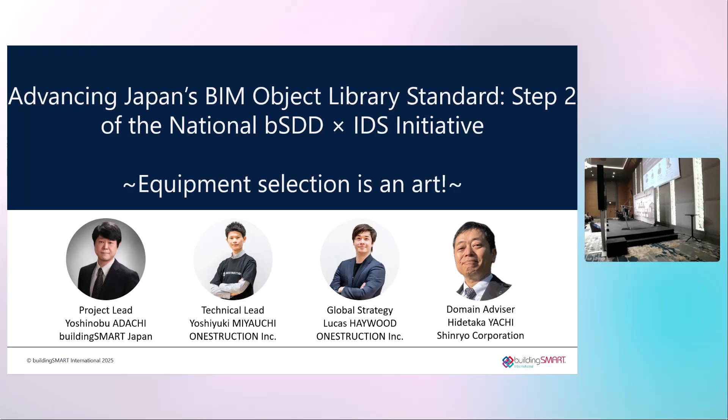Very short introduction. So today's agenda, let's jump ahead. At the Singapore summit this past March, we presented the roadmap and activities for developing the Japanese object library. Here at the Berlin summit, we will focus on more specific use cases and present how the library can be useful. We hope this session will be practically beneficial for those involved in equipment selection.

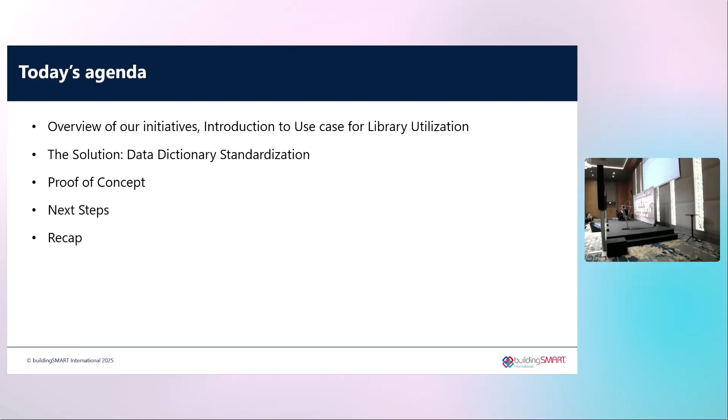Okay, so first of all, let's review the content from the Singapore summit this past March. After that, we will introduce a specific use case for leveraging the library.

So we are currently working on standardizing BIM object libraries using bSDD and IDS. This initiative is aligned with the global openBIM movement while being unique to Japan. We will present our library development roadmap, which we also shared at the March Singapore summit. At the Singapore summit, we introduced the development of the library template. Some may have found the conceptual and academic content confusing. At this Berlin summit, we will discuss how we are building the necessary concrete libraries and specific use cases, and demonstrate their effectiveness.

So we will explain the use cases we selected this time. As one use case, we will discuss equipment selection during the pre-construction phase of a building. Now let's turn this slide. Let's show the use case, yes. Mr. Yachi.

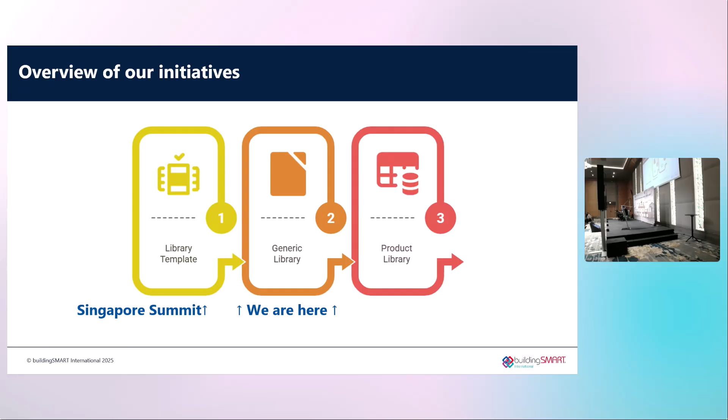Now, from that, I take it over. Today's presentation will focus on equipment selection. When selecting the right equipment, it's common practice to first refer to the manufacturer's catalog. However, equipment selection is becoming increasingly complex with diverse design requirements, environmental considerations, and regulatory compliance. The burden on the design engineer is growing daily.

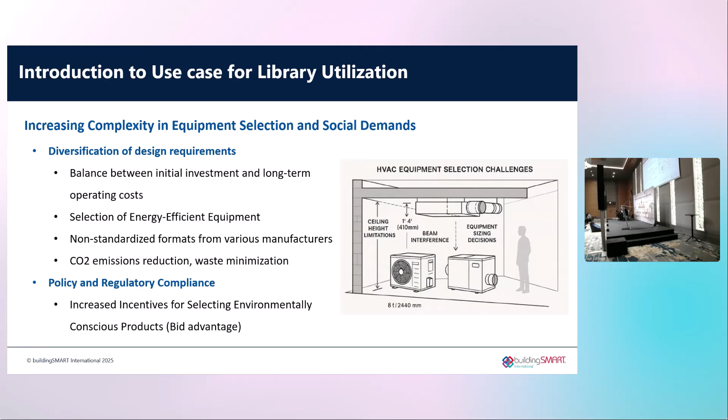This slide lists some of the challenges that engineers constantly face. When asked, everyone asks me, do you always struggle with those issues? My answer is yes, we are constantly trying to find the best solution. Okay, we cannot install the 10 kilowatt unit in the ceiling.

We cannot install a 10 kilowatt unit on the ceiling, so let's install the 5 kilowatt unit instead. First, we need to carefully check the installation conditions, such as the installation space and environment condition. The design specification can have a significant impact on the cost. Furthermore, depending on the operating conditions, power consumption can vary considerably.

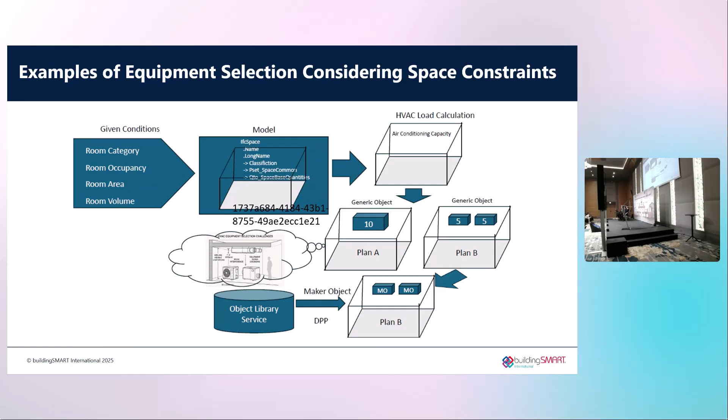As an environmental specialist, I have a strong responsibility to address the global challenge of reducing greenhouse gas emissions. I can confidently say that the HVAC systems I design always consider environmental impact assessment, such as life cycle assessment, LCA.

In the final decision-making stage, we refer to the catalog again, considering the performance data provided by the manufacturer and the installation condition. We use calculation and simulation to verify sustainability, cost effectiveness, and environmental impact. This is the process of selecting the optimal equipment, and I believe this is truly the best way to make a selection.

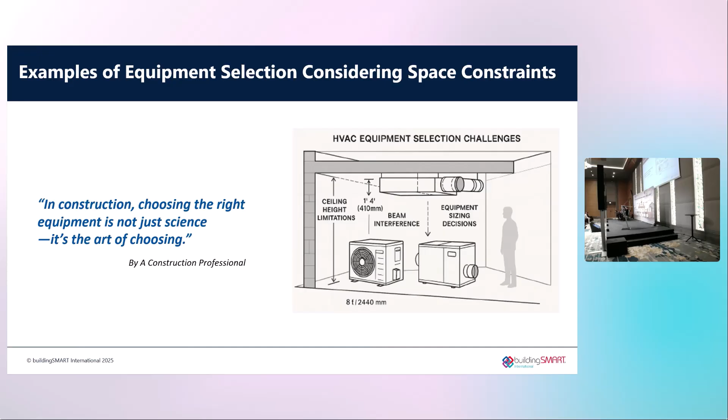Some engineers may find this work rewarding. However, in reality, it often leads to long working hours, because human capability has limitations.

This process often becomes a bottleneck. As a result, we may not be able to provide the optimal solution. Again, the goal is not simply choosing the equipment. The real challenge is to select the best option from among multiple choices, each with different conditions. We are purposely using generic data in this phase.

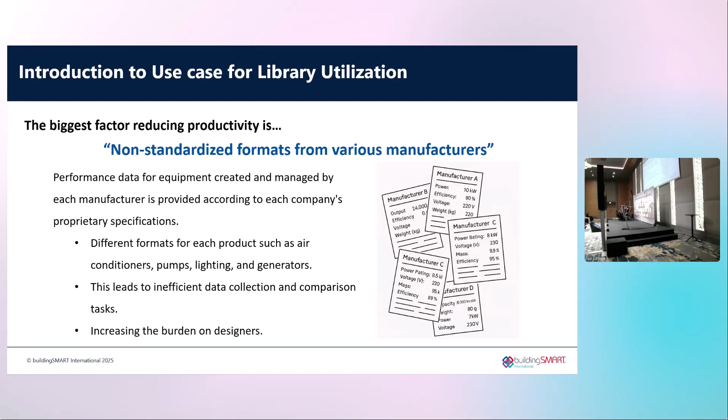Okay, so Mr. Yachi talked about the reality of the environmental design process as engineers. So in my part, I'd like to summarize and connect how his story relates to the generic object library and the bSDD. So far, Yuki told about the Singapore summit.

If I summarize again, we tried to convert the existing BLCJ, BIM Library Consortium Japan's published spreadsheet format object library template, into bSDD. That was the summary from the last summit. So on top of that, this time we took on the challenge to populate the generic object library on bSDD. That is the focus point of this presentation.

The generic library provides generic information of a product, and it is independent from specific manufacturers, very neutral, standardized information. This generic information covers basic information such as type, product type, performance, capacity, and object size as dimensions. For example, this kind of information is very useful for technical calculations for air conditioning design. So this is the basic idea.

In this slide, I'm going to look at how the generic object library plays a role in design processes. If we were doing environmental design or HVAC design, you would probably first identify the basic spatial information, such as space type, area, volume, and occupancy numbers. These are typically non-graphical information at the beginning.

As the design process moves forward into pre-construction, coordination with other design disciplines becomes very important and essential. For example, the architectural team provides key room information, and in HVAC design, key factors such as room height and pipe space cross sections are critical for selecting the right product. In this process, the generic object library is particularly useful, allowing us to coordinate spatial reservations with other discipline models and to get the basic information for quick product selection.

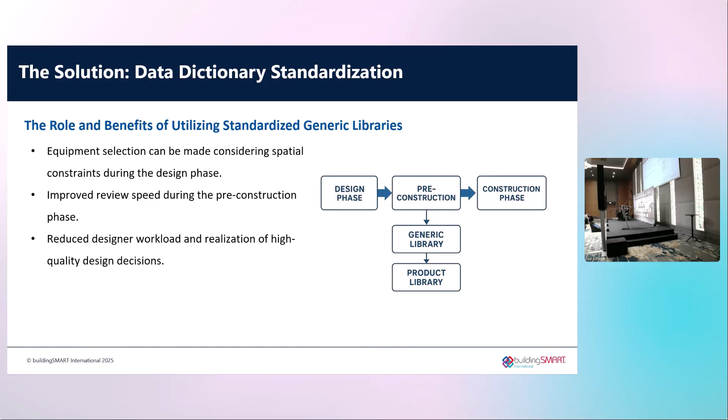This is my last slide, and the message is very simple. If we were to put all the attribute information from the generic object library into a proprietary BIM object format, it would be very difficult and costly to manage that information, and it would also be very difficult to utilize the standardized attributes in downstream applications.

Based on our past experience, a best practice could be to manage attribute information on generic object libraries with bSDD and to keep a single source of truth environment. Although there is no established method in this field yet, we tried to carry out a proof of concept as part of our bSDD use case development project. Next, Yuki will introduce the POC part of our project. Thank you.

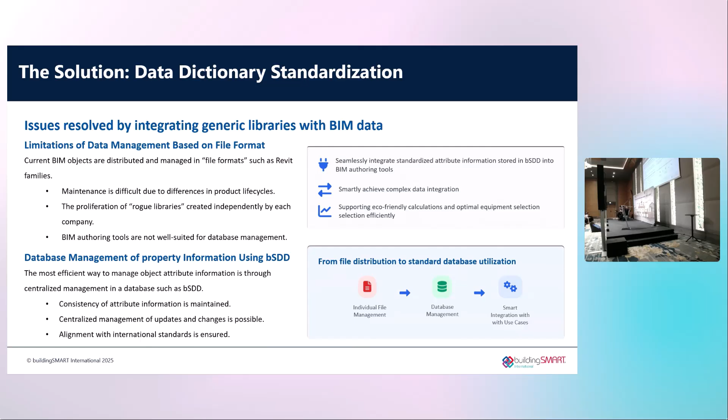Okay, so now it's time for a very short proof of concept. We spent a lot of time explaining the use case concepts and centralized management of information property sets using bSDD. So I will briefly show the proof of concept.

For the proof of concept, we adopted OpenAEC, an all-in-one tool for openBIM. It enables low-cost implementation of openBIM, making it a highly affordable solution even for projects with limited budgets. Additionally, it offers high compatibility with, for example, Autodesk products, so not all project participants need to own BIM authoring tools. Collaboration between OpenAEC and Autodesk products achieves cost optimization.

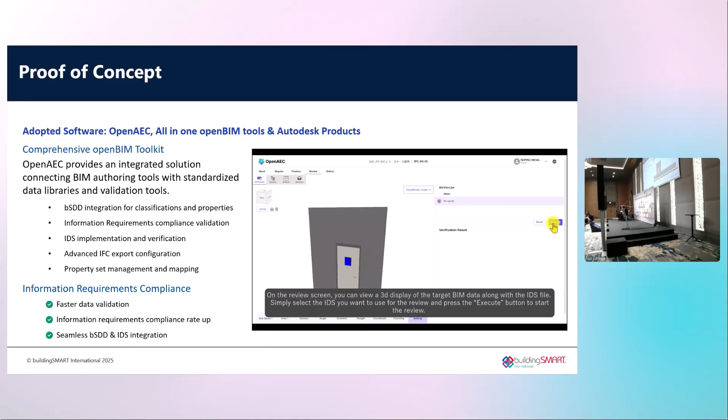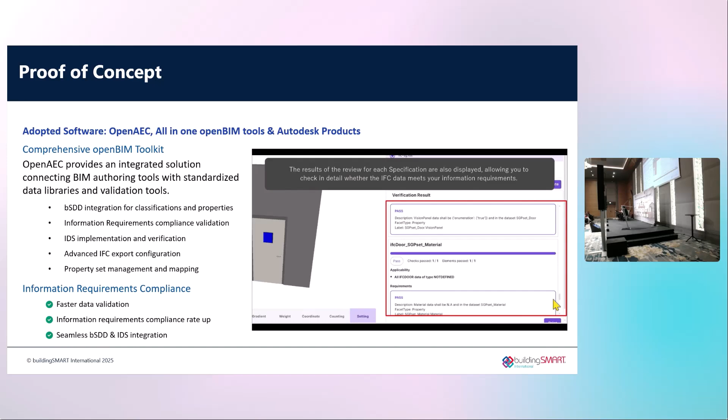OpenAEC provides an integrated solution connecting BIM authoring tools with standardized data libraries and a data validation tool. You can create both bSDD and IDS, and you can also import IDS into IFC to perform compliance checks. Recently, we have added support for automatic conversion to IFC by uploading Revit files, which frees people from the task of converting to IFC. During IFC data reviews, our product contributes to improving BIM data traceability by recording who reviewed which data.

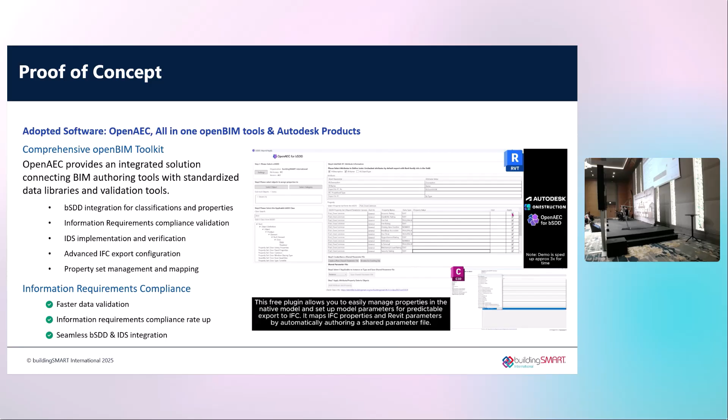Using the software adopted in the proof of concept, we leverage the generic library with clear results. Time required for equipment selection has been reduced, and the effort involved in reselecting equipment has also been significantly reduced. However, since equipment selection involves many use cases with a wide variety, our POC is highly limited, and metrics cannot be disclosed at this time. We plan to continue verifying various use cases and creating evaluation metrics.

Okay, so it's done. Final presenter.

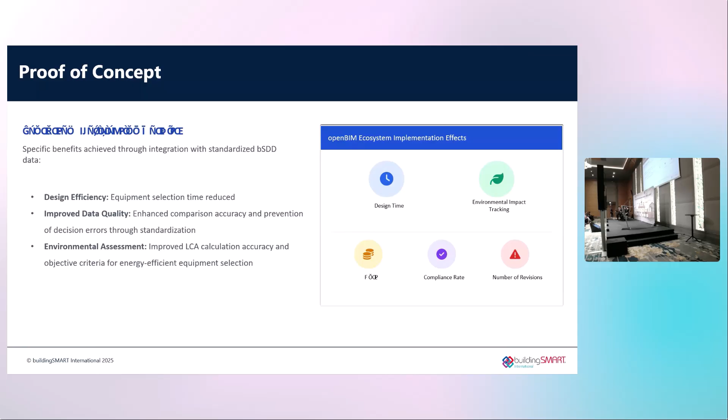Might go back one slide there. Okay, it's back. So yeah, if you didn't see it before, all jumbled up - design time and number of revisions are some of the benefits of this.

So today you guys saw some information about the real problems with equipment selection, especially in Japan, the reason for developing the generic library, and then a proof of concept workflow for that process, which involves the buildingSMART data dictionary.

Going forward as next steps, there are three key areas we feel we need to progress in. The first one is registration with the use case management system. As members of buildingSMART Japan, and as a company that is a proponent of openBIM, one of the things we hope to develop is this project to the point of registering on the use case management service.

In that way, contributing back towards the repository of shared global assets and workflows. The second thing is around environment and sustainability. This is a really important factor when it comes to equipment selection. Nationally within Japan, there's a push to standardize life cycle analysis requirements. We hope to promote the compliance of the products, and also the generic library, with the data requirements of these internal Japan standards, but also international environmental standards.

I think that's also very important, because right now a lot of equipment selection is focused on sizing and design and performance, whereas we feel it has the opportunity to be pushed through this kind of project and library and object selection into something that allows you to trace and then ultimately reduce embodied and operational carbon across scopes 1, 2, and 3, essentially up and down the supply chain.

So to recap, I think really the core points of this project are to make the process of selection easier and better. As Yachi-san mentioned, the process of selecting equipment is a little bit siloed within Japan. You're not allowed to select exact equipment during the design stage - that needs to come later. So we've broken up that process into selecting generic objects for sizing purposes, and then someone can match real products onto those generic objects. By having this library and having the restrictions and the kind of digital passports attached to those objects, people are able to do that design and equipment selection much easier, much faster, and at a much higher quality.

The second thing is accelerating the digital shift. Within Japan, we always say DX, which is digital transformation.

To what extent that has been accelerating or decelerating or staying flat is a point of discussion, I think. But really with this, we want to help people in the construction industry and manufacturers adopt these kind of digital workflows that are becoming more recognized and standardized throughout Europe and the world. So I think as Japan, we need to align with that and keep up and accelerate.

Enhancing manufacturers' international competitiveness, I think, is really important with leveraging this, so that we don't stay fully centered within Japan only. Obviously there are Japanese requirements that need to be met by manufacturers, but international standards become just as important. Having a dictionary of products that is compliant with international standards allows the Japanese manufacturing industry to remain competitive on that international stage, which is very important for us.

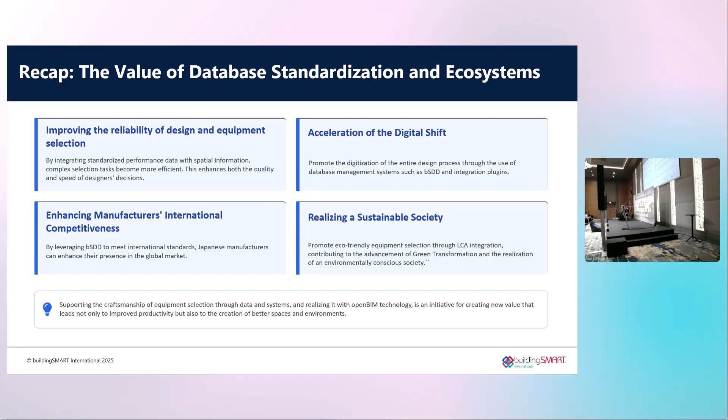Thank you for your presentation. I was wondering, when you mentioned LCA, there was a lot of presentation about the digital product passport and combining product data - so maybe some of the LCA data might come through the digital product passport. Just as an observation.

Yeah, the digital product passport presentations were very interesting for us. As a reference, I think they're doing it slightly differently to how we currently are through the bSDD. I think they're also doing it through - we were talking to Christian a little bit earlier - like AAS, allowing manufacturers to manage their data. I think we need a solution for that, and whether or not it's going to be exactly the same technology as the DPP is a question. But by complying with, generally the Japanese object libraries are within Japan, being able to compare and share information with other product libraries and do that kind of linkage is a very interesting concept.

This is one of Japan chapter's challenges, because there are a lot of Japanese manufacturers coming to the European market, so they should know about this kind of DPP or CPR. But we don't - Japan chapter has no tight connection to manufacturers, so we need much more conversations and to get such new companies involved in our chapter.

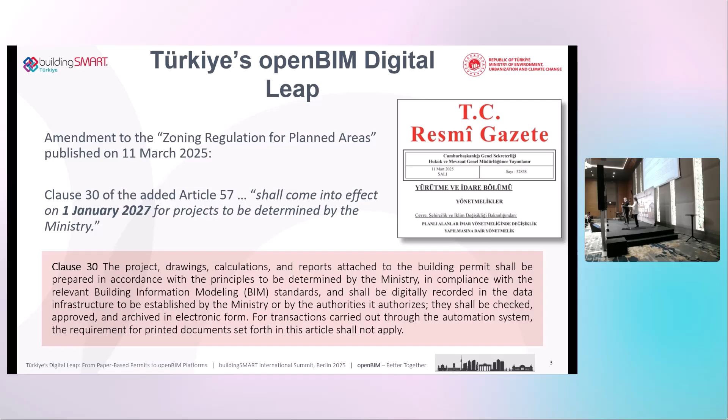Starting with buildingSMART Türkiye, I'll briefly talk about how we got here. We started in 2016, joining the airport room. My company builds airports, and we were at Schiphol Airport for the first meeting sponsored by Schiphol, where we saw and heard about buildingSMART. We organized under İMSAD, the Turkish Construction Manufacturers Association, applied for membership, and became a chapter in 2019.

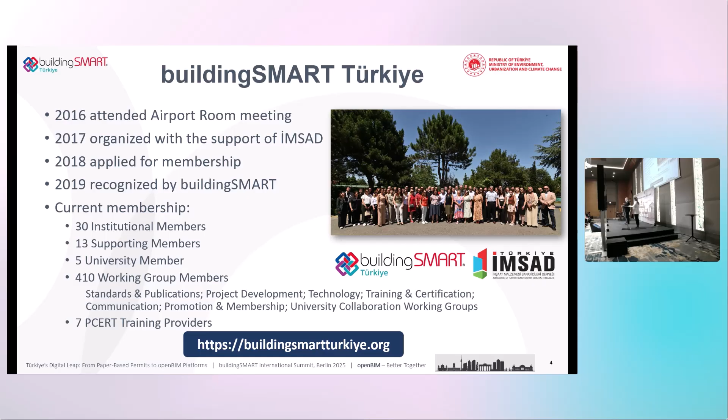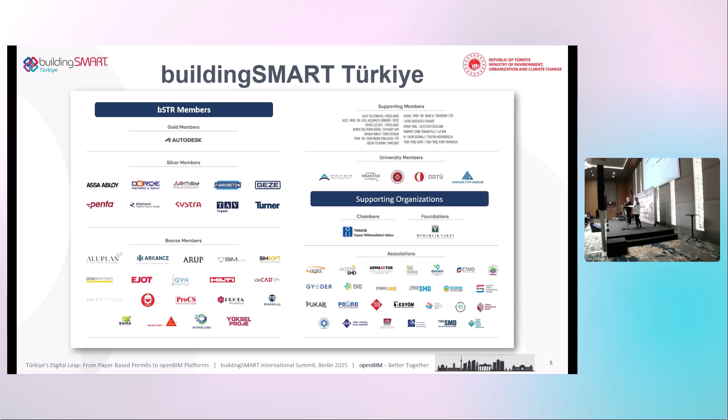We have a very good, healthy organization and membership, with several companies from different fields - software vendors, main contractors, design companies, universities, and a lot of organizations and chambers in the industry. So we're fairly well represented within Turkey, and we're very active, at least within our own industry and market.

We have a lot of collaborations. As I mentioned, the Turkish Standards Institute, we helped adopt all the relevant BIM standards, translated them, and created a unified language for the industry. We also worked with the Istanbul rail system for their BIM standards.

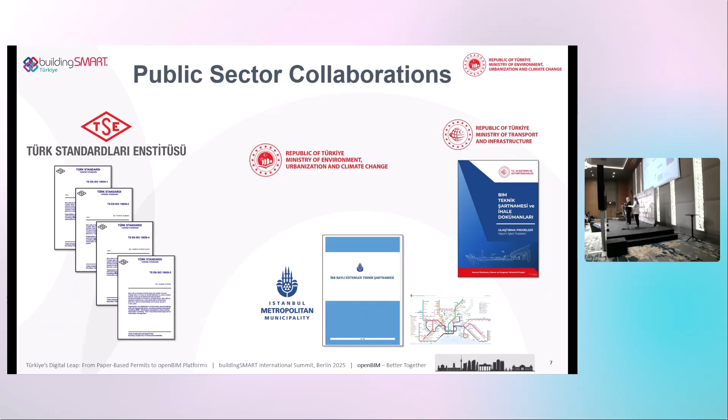Our members supported creation of those standards, and also the transport ministry BIM standards and tendering standards. All our members were involved in these, and of course today with the ministry, with e-permitting now. The public sector being the driving force in all this, I'll hand it over for the story of how we

came to today through the ministry and all their activities. Thank you, Ahmet. In Turkey, the Ministry of Environment, Urbanization and Climate Change is the driving force for BIM adoption. The ministry protects the environment, develops climate policies, and ensures safe construction through regulation and inspections. It also supports municipalities with planning standards and urban transformation projects. This strong public sector leadership is essential for the digital transition in the construction industry.

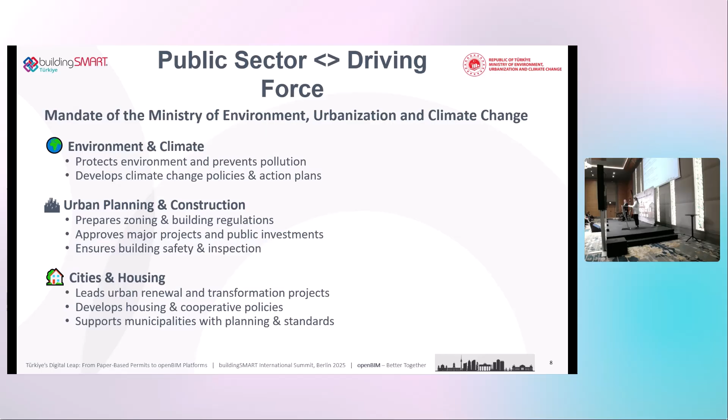The Directorate General of Vocational Service that I work in regulates licensing and professional standards for engineers, architects, and technical staff. This also includes regulation zoning projects. The Directorate General ensures technical quality and professional competence in the sector.

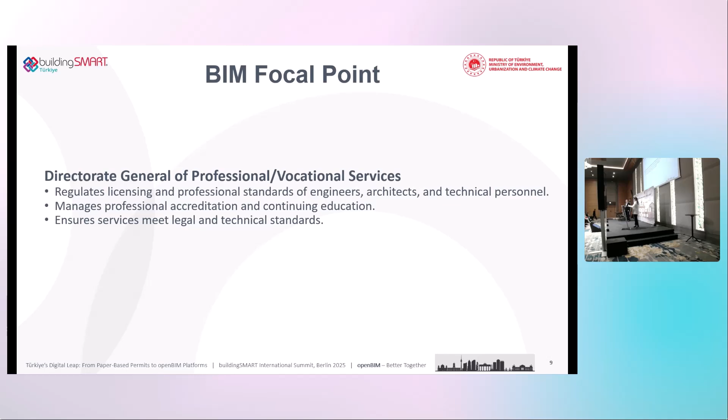Since 2019, the Ministry has taken significant steps towards BIM adoption. It joined the Turkish Standards Institute BIM Mirror Committee. Then we established a BIM working group and initiated collaboration with buildingSMART Turkiye. In 2021, BIM training programs were provided to more than 100 managers and technical staff. The Ministry also recommended expanding BIM courses in universities to prepare future professionals.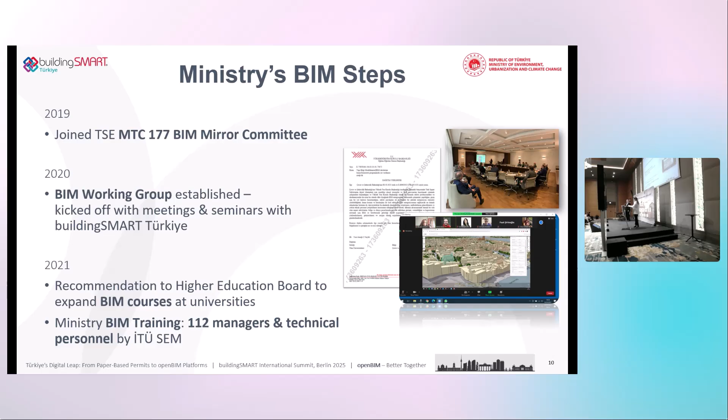The Ministry then prepared a roadmap for BIM integration and presented it to its directorates. The following year, a pilot project was launched, the Fikirtepe Secondary School, a 7,000 square meter building with 24 classrooms. This project, developed with Emlak Konut, served as a real example to test BIM-based design and approval processes.

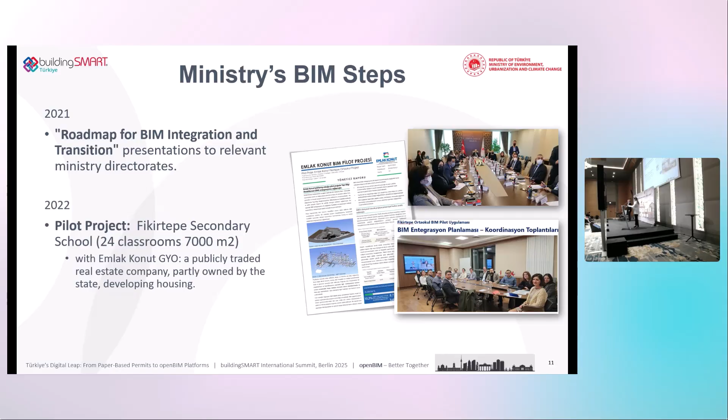In the 12th Development Plan of Turkey, digitalization in construction is highlighted. The plan calls for mandatory use of BIM and life cycle analysis in public procurement, the establishment of legal frameworks for digital project delivery, and integration of IoT technologies into construction projects. These policies demonstrate a strong national commitment to digital transformation.

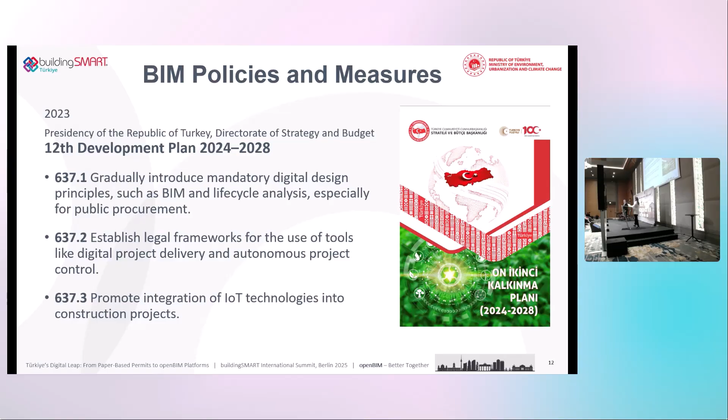The Ministry's Strategic Plan 2024-2028 also highlights digitalization. Its main objectives are to promote green buildings, strengthen professional competence, and ensure safe construction through effective oversight. The plan assigns the Directorate General of Vocational Service to lead the digitalization of the construction ecosystem.

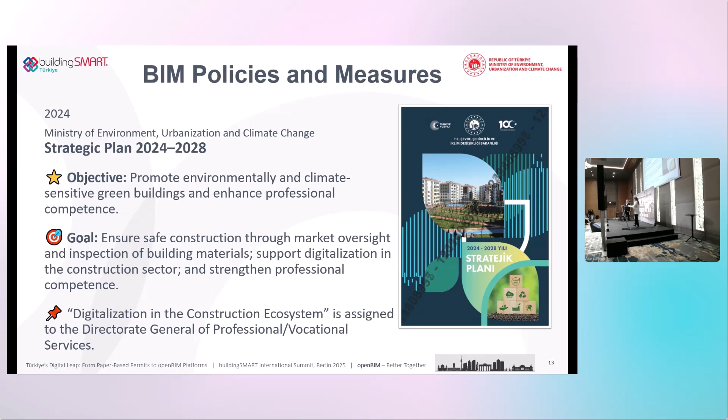According to the strategic plan, several strategies will be implemented. These include establishing a legal and technical framework for BIM integration, creating a BIM-based project delivery system, and enabling centralized management of 3D digital building models. The goal is to make the building permit process fully digital, standardized, and compliant with BIM standards.

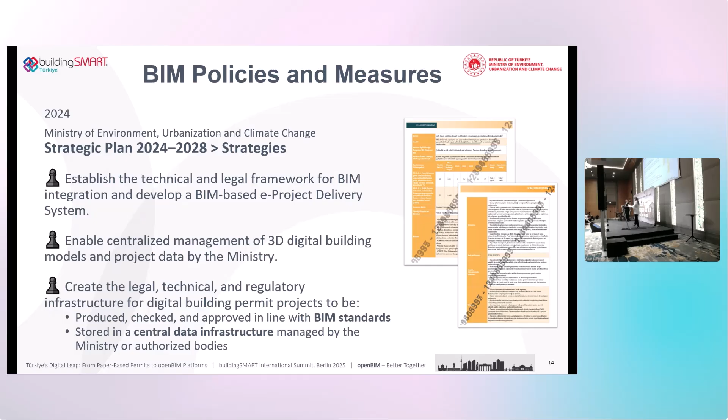Last year, Turkiye organized a digital construction and BIM collaboration program with the UK Department for Business and Trade. Focus group meetings were held with public, private, and academic stakeholders, involving more than 90 participants. This year, a national BIM roundtable workshop was conducted with 62 participants who worked on practical integration strategies.

The workshop resulted in a clear vision for the future. Turkey aims to achieve full digital transformation in the construction ecosystem, creating a built environment that is safe, efficient, and sustainable. This vision guides all ongoing and future activities in BIM implementation and digital project delivery.

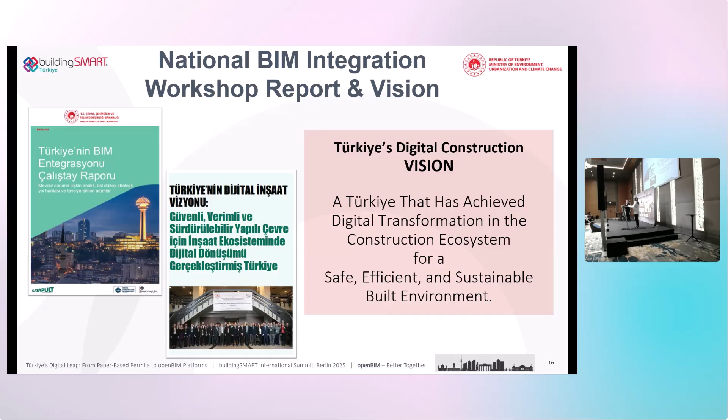So the foundation of where we are today is a long story, and just aligned with the amendment, there was an agreement with the Ministry and Istanbul Technical University to provide a foundation outline of all the changes and infrastructure needs for an e-project infrastructure that would support e-permitting in Turkey.

So there's a group of professors and academics from Istanbul Technical University, along with Middle East Technical University and buildingSMART Turkiye's members, working together to define the changes needed in regulations, the infrastructure needs, and the architecture of a system that will support all these submittals.

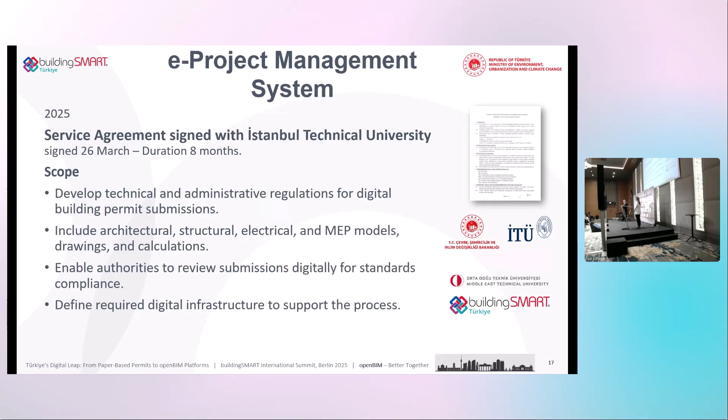The service agreement was structured in 3 phases. The first phase is complete, which was basically an overview of what other countries have been doing in the adoption of e-permit processes, and the challenges and opportunities.

The ongoing phase 2 is basically defining first a 2D digital delivery. Many of the municipalities are still submitting papers. There are a few municipalities that have their own infrastructure. And of course, phase 3 would be a full BIM delivery.

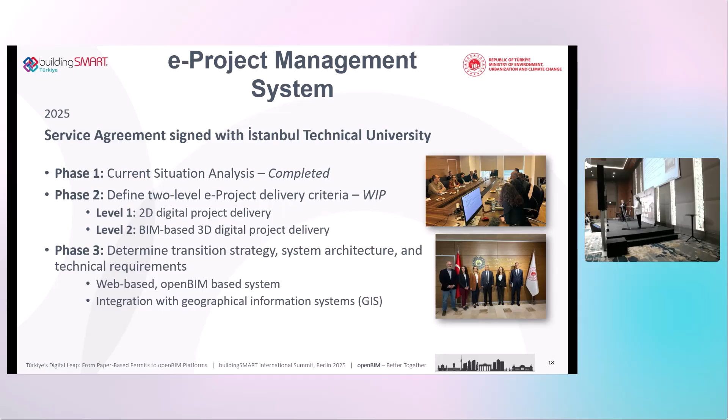Then phase 3 would be defining the IT web-based openBIM infrastructure, ready for procuring such an infrastructure in the next year. All of this is to be integrated with the ministry's current GIS systems as well, which we'll briefly discuss.

Along with this, we launched a webpage as a resource for what's going on, the National E-Project Management System webpage, that's going to become more and more populated with outcomes and supporting material for the industry, for the market in Turkey.

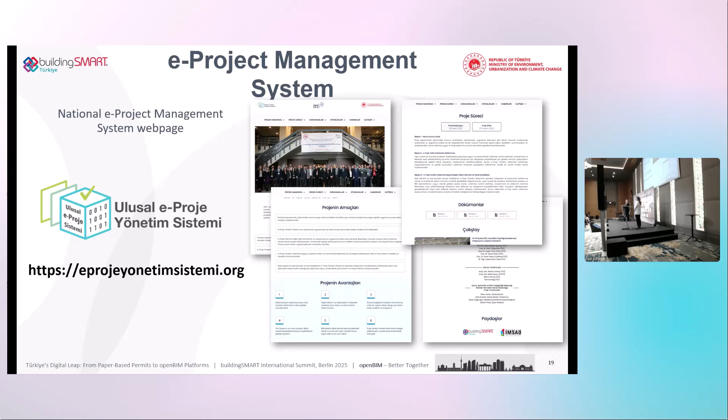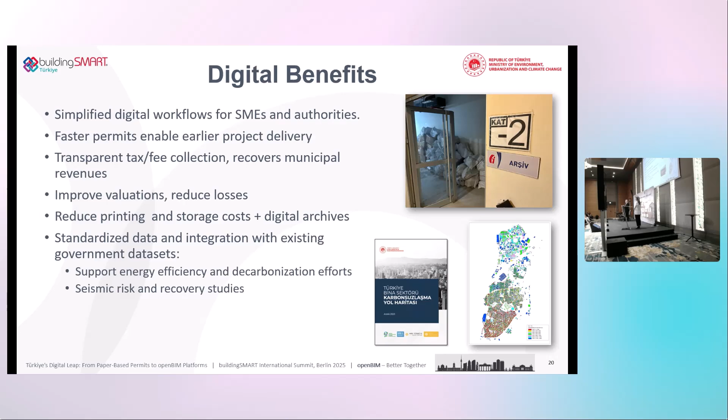The scale of impact: we have more than 70,000 design offices in Turkey. We have more than 1,300 municipalities that will be impacted by this change. In the last 2 years, we have more than 150 million square meters of permits granted. That's about 130,000 permits a year, and the average is about 1,000 square meters of built area for permits.

There's several parties involved, and I think what we're doing in Turkey is a bit unique in the sense that many other countries started very big. In Dubai, I think it was more than 20 to 50,000 square meter projects were required to have BIM. We're starting small in a big way, where we're focusing on the small projects across the country. The average, we're still working on it, but focusing on housing projects and office projects, 2,000 to 5,000 range, and then gradually expanding the size and impact.

This way, the problem space is much easier. We're talking about very simple projects, obviously on a much larger scale, rather than try to tackle much more complicated projects like airports and hospitals.

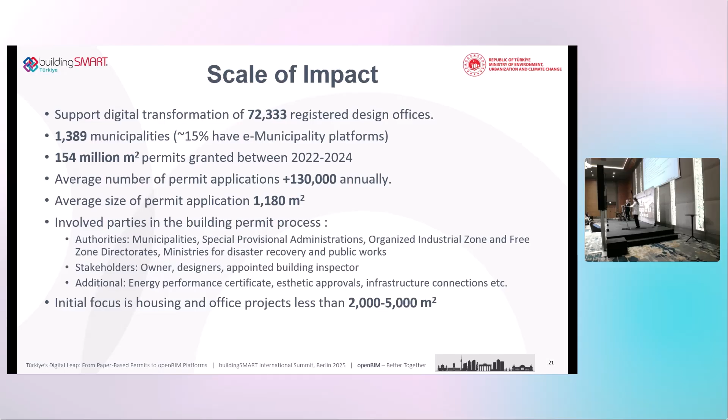So this is a case study of an actual permitted project. It's 3 floors, about 2,000 square meters. This is the average target project that we're looking at to achieve across Turkey. So the whole application file was digital, at least in this municipality, in the sense PDFs, scans, and DWGs. There's about 700 megabytes of data.

140 PDFs, so about the majority of them was obviously drawings, and then a few videos. Typically, they document the boring and geotechnical studies on site. And with a total of 168 signatures, some of them digital, some of them physical signatures.

You can see the unfortunate consequence of paper-based documents. The bottom long drawing is the architectural set. They typically have a single title block with all the signatures on the left and the whole gamut of drawings, maybe 10, 20. I know you're laughing, it is funny, but that's basically an adaptation of practicality where you have to stamp and sign things. On our airport projects, we have tens and thousands of projects that need to be stamped 8 times over. So just the process of stamping projects is a huge burden that hopefully will be taken care of through this digital approach.

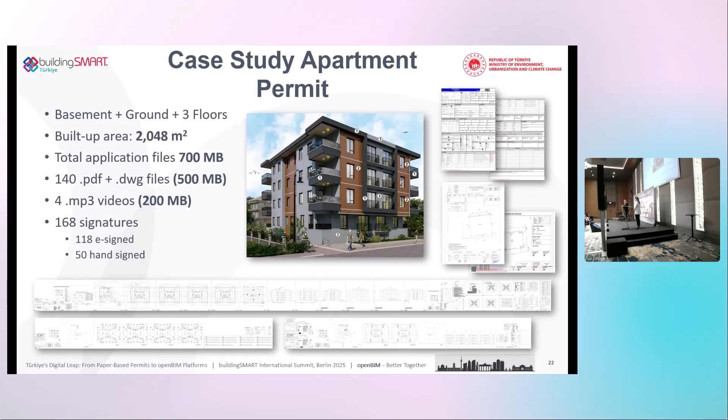And of course, the ministry wants to turn into decent, regular sheets, as you would expect to have. And they already have that infrastructure, the standards defined. So the typical permitting, you have e-signatures on this. This is architectural title block. So technically, on just the technical documents, you have about 11 drawing sets and 50 signatures just on the drawings themselves.

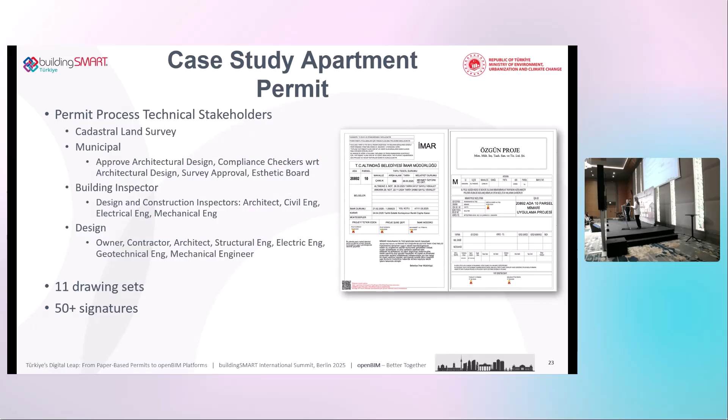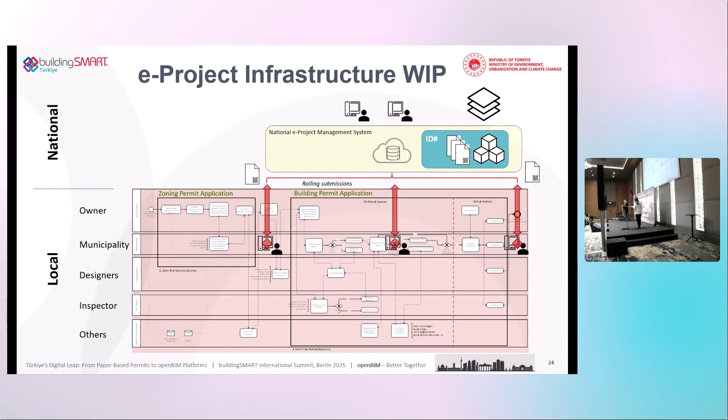So the infrastructure that we're looking at, you can see the process, the workflow between the owners, municipalities, designers. You have the zoning permit application, then you have the building application to the right. And the idea is adding an infrastructure on top of the e-project system where the submittals will be in a digital manner, shared and archived, integrated with the municipality infrastructure. This is work in progress, but obviously everything is aimed to be on an openBIM stance.

In the metrics, looking at the size of all this data, depending whether it's going to be a pure BIM project versus put everything in, about a gigabyte of data per application. We're looking at 60 to 200 users per permit with 20 to 200 signatures in each permit cycle. So if we have 130,000 permits a year, that's about 13 to 130 terabytes a year. About half to 1 million users on the system submitting their drawings and evaluating them, and about 2 to 26 million e-signatures a year. So this is the kind of size of that infrastructure that we're looking at to take care of all this process in Turkey.

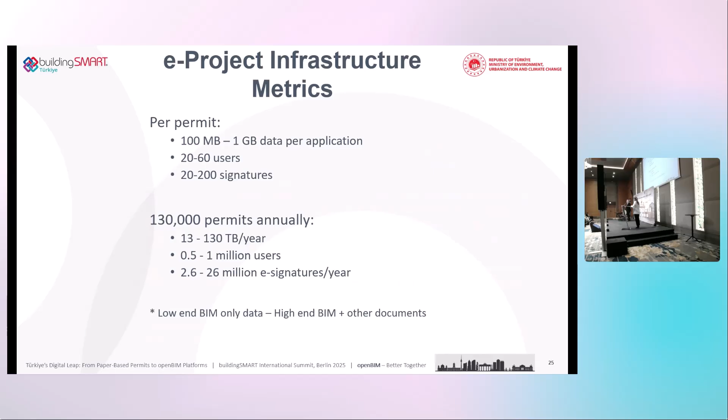So the planned work ahead, as I mentioned, we have the İTÜ team completing the report that will lay out the regulation requirements and the IT requirements for the ministry. That's planned to be published at the end of this year.

Also, as buildingSMART Türkiye, we're supporting the creation of examples, training materials, developing the modeling guidelines on the IDMs, IDS, and bSDDs associated with that. Being an apartment project, it's actually comparably easier to handle since we're talking about simple dwellings. And then there's the RFP for the infrastructure requirements themselves.

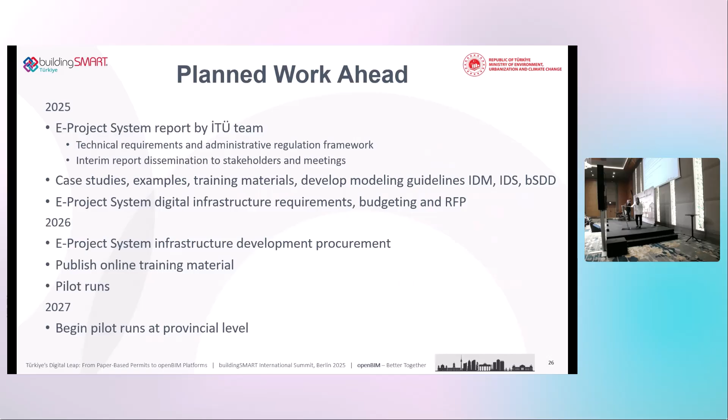Next year, the procurement and start of developing that infrastructure, publishing the online material onto the website that we launched, and starting public pilot work with the municipalities. We already have about 4 or 5 municipalities engaged, and we expect to broaden that. Then in 2027, on a provincial level, start pilot work, and eventually expand that throughout the country.

That's about our presentation, and thank you for your time.

If there are any questions, I don't know how we are on time, but... Thank you, Tony Gillenberg from Solibri.

So I saw that you guys were talking about BIM models and PDFs a lot, but are you looking to get into IFC-based code compliance checking? Yeah, well, when I say BIM, you can think of IFC. It's strictly open source.

You expect all the submittals from whatever vendor those models should be produced to be submitted to the system strictly as IFC. There is an argument about the CAD drawings, it's still in discussion. PDFs are useful, but for assessing -- because the ministry also wants to check not just the content, since building inspectors already do the technical reviews for the submittals, but also the formats and compliance of the CAD drawings and the BIM models. So we're also thinking of DXF or other alternate formats, but strictly non-vendor-locked. So almost everything would be archivable text, ASCII, IFC, and PDF.

Good morning, everyone. It's like this table is on this side, but everyone's sitting there. So I will try -- no, I'm not going to move you. I'll try to cover the whole audience.

Good morning. Thanks to buildingSMART for inviting me and accepting my presentation, and thanks to buildingSMART for everything they do for BIM and openBIM. And to prevent questions later, if I say BIM, I mean openBIM, because I'm talking about the BIM Act. And the other thing,

we take a completely opposite approach to Turkey, because we're starting from above-the-limit constructions, and it doesn't say what's a better approach -- we need to try. So my name is Leoš Svoboda.

I represent the Ministry of Industry and Trade, and at the same time I'm chapter leader of buildingSMART in our country, which was first. I started as chapter leader in 2021 when we established the Czech chapter, and just a couple of years later, in '24, I joined the Ministry of Industry and Trade, which is responsible for implementing BIM in our country, and I will give you some details on that.

My background is I'm a civil engineer originally by education, and then I spent over 20 years in an international corporation focused on software production, mostly in GIS and AEC. So I come from information management, but in a broader sense. I'll be talking about this new Czech BIM Act, in short, which has a very different name -- there's no BIM mentioned in the act at all, but it's about information management.